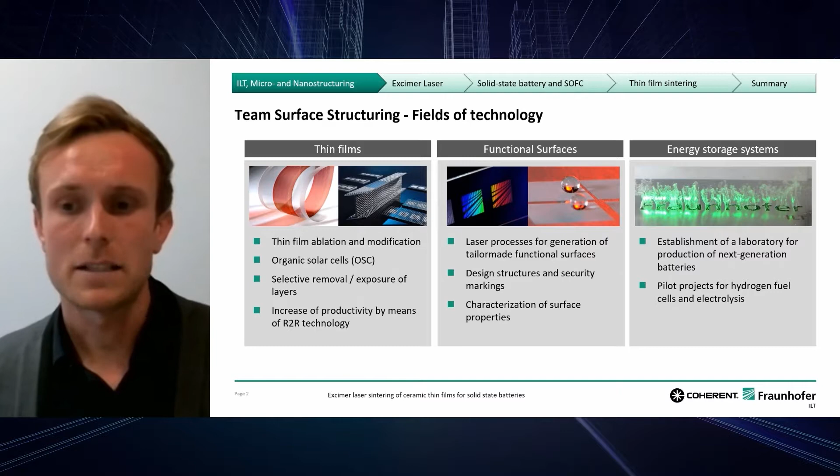For that we established a new laboratory with equipment for both production and characterization. One very important tool for the production is this laser system from Coherent. This laser system consists of two parts: the laser itself, and the optical guiding system, which modifies and guides the beam towards the working station.

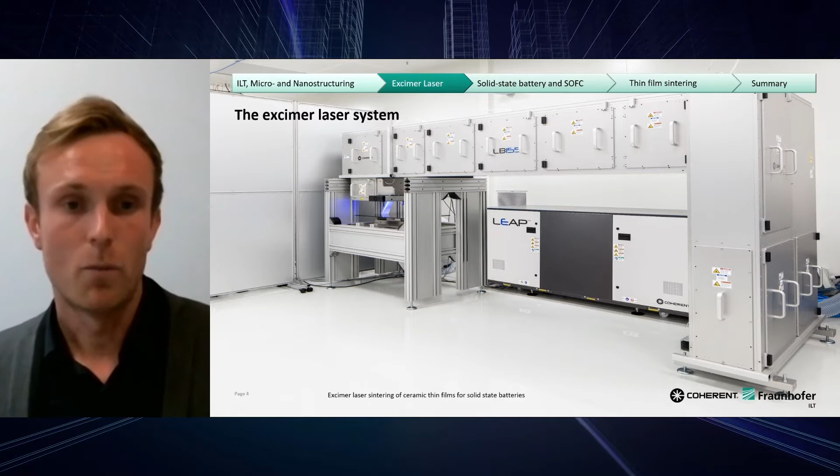To give you more information about this laser station, starting with the laser: it operates with a gas mixture of krypton and fluorine, resulting in a wavelength of 248 nanometers. That's very short, and due to that we have very short optical and thermal penetration depths, which is very good for material processing. Due to its high pulse reproducibility, shown top right, of 1 joule per pulse, and its maximum repetition rate of 150 Hertz, we can obtain a maximum output power of 150 watts, which is pretty large.

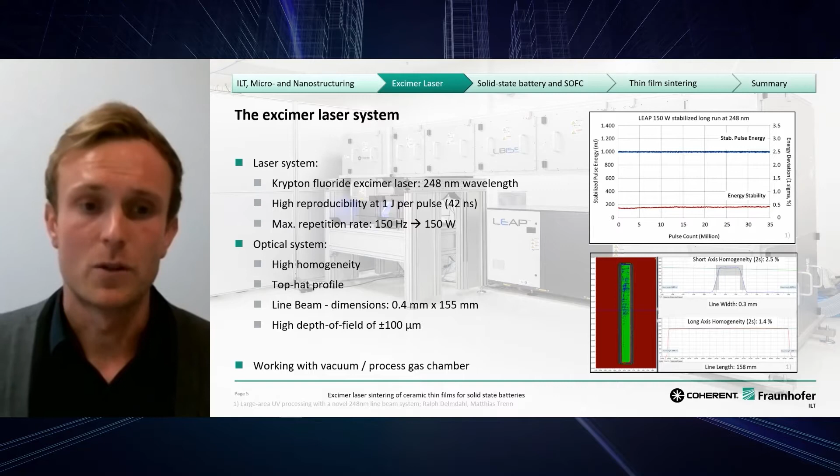Another unique characteristic is the optical system. First, the top hat profile with a line beam dimension of 0.4 times 155 millimeters, which is pretty huge compared to a commonly used laser system. With its high homogeneity, shown at the bottom right, and its very large focus field, we can process large-scale samples, which is very good, also with a vacuum or process gas chamber.

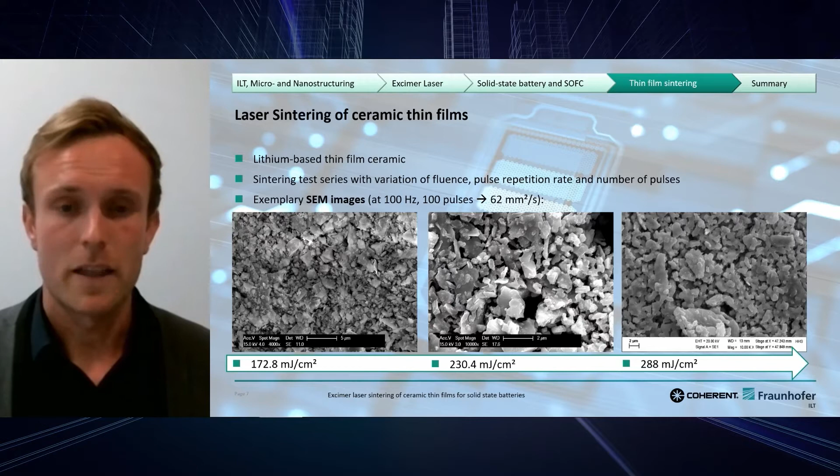Sintering is possible in general, but another thing to look at is whether the electrochemical properties stay the same, or whether they maintain.

On the other hand, we can say that with the sintering process, a phase change can be avoided. There's only a variation of intensity, which can be related to a rearrangement of the lithium ions to another lattice structure or orientation, but this will not impact the electrochemical properties.

Another look should be taken at the layer thickness, because with that we can determine the maximum energetic penetration depth. This is the depth beneath which the material will not see any light, any energy, any thermal damage.

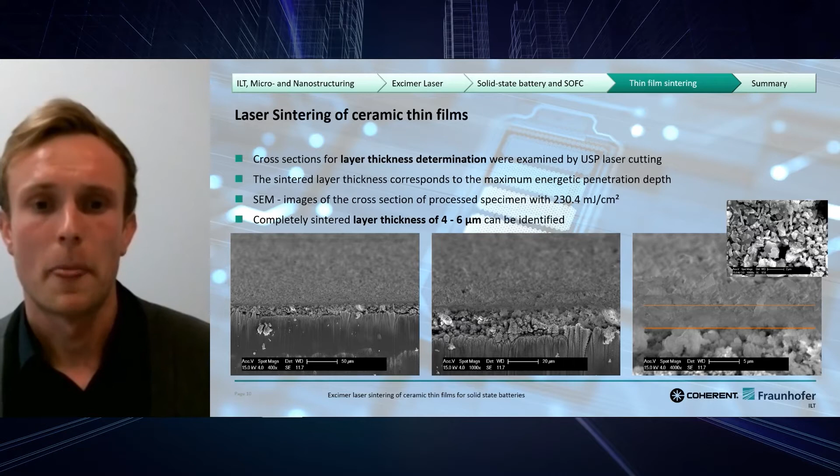To sum up, we can say that the complete sintering of ceramic thin films is possible, that we have to stay beneath a fluence threshold to avoid a phase change, which can occur at higher fluences, and that we can precisely carry out depth-selective sintering of these samples.

Proof that the electrochemical properties maintain has yet to be carried out, but I want to mention one other thing: this process can be easily upscaled.

Thinking of a laser system that provides more power, such as the Coherent VYPER system, or a larger top hat profile with the line beam 1500.

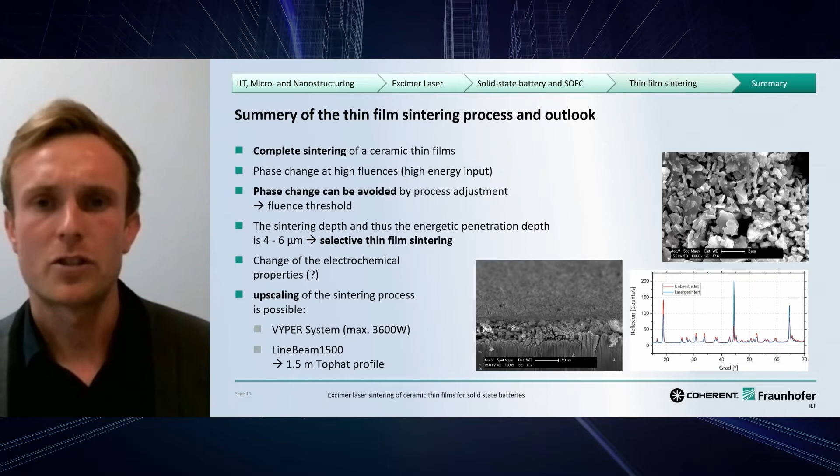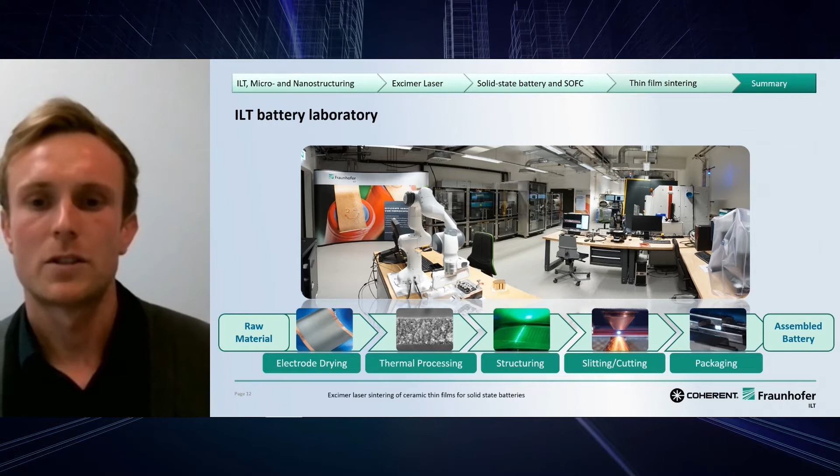Last, I want to mention our new laboratory at the ILT, in which the characterization of the electrochemical properties will be carried out in the future. This laboratory is not only for the characterization, but also to present a whole process chain from the raw material to the assembled battery. And with that, I'm at the end of my presentation.

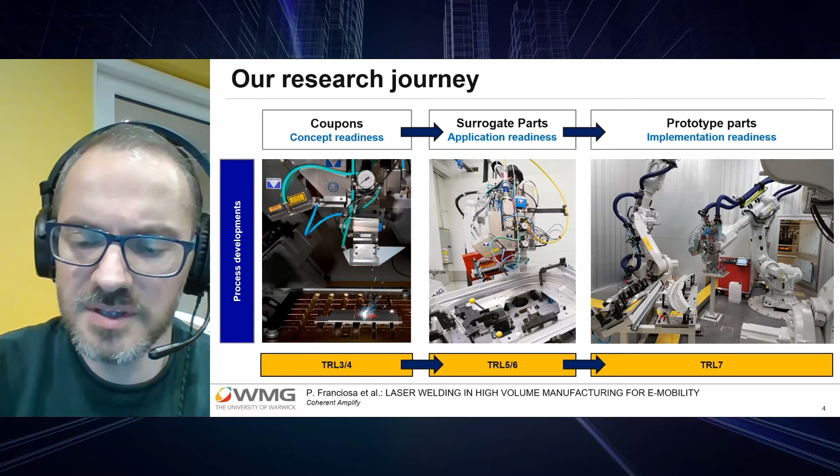Now, talking about the applications we have been developing using the ARM laser technologies, you can see here three examples. Clearly, given the time, I am not discussing all the applications we have developed, but I have only selected the 3 core most relevant ones for today.

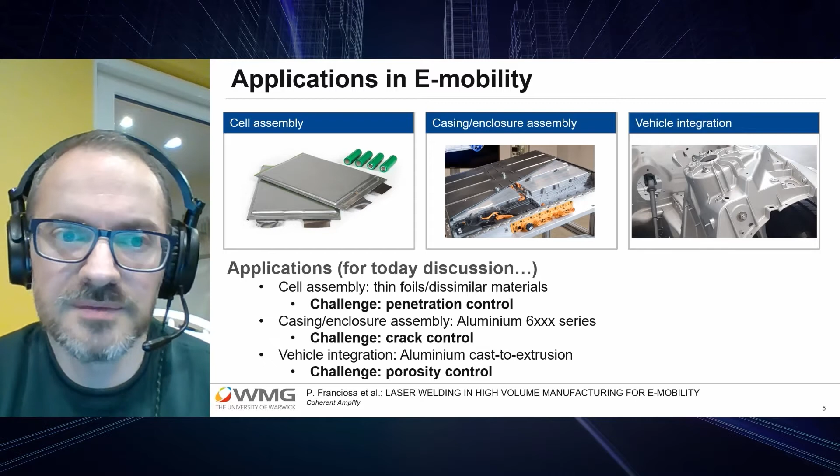Let's start from the equipment. First, we have used the Coherent 10 kilowatt ARM laser integrated with the Precitec WeldMaster, and also interesting to mention the sensor we have used for in-process monitoring of the weld depth penetration: the OCT sensor from Precitec, the IDM sensor from Precitec.

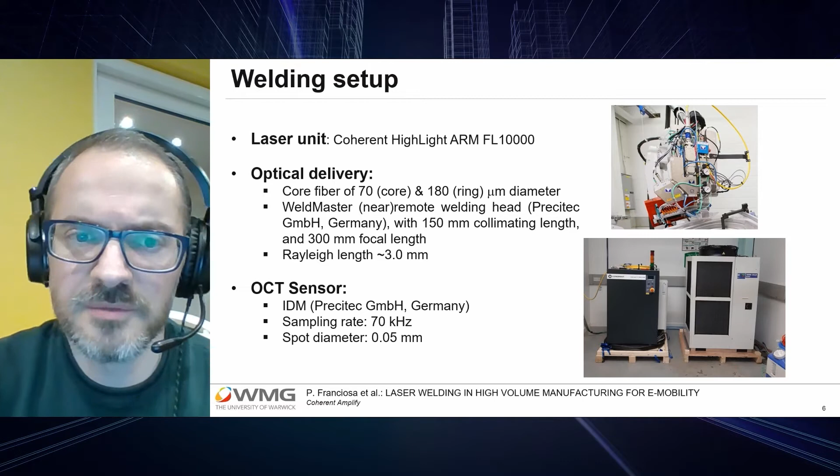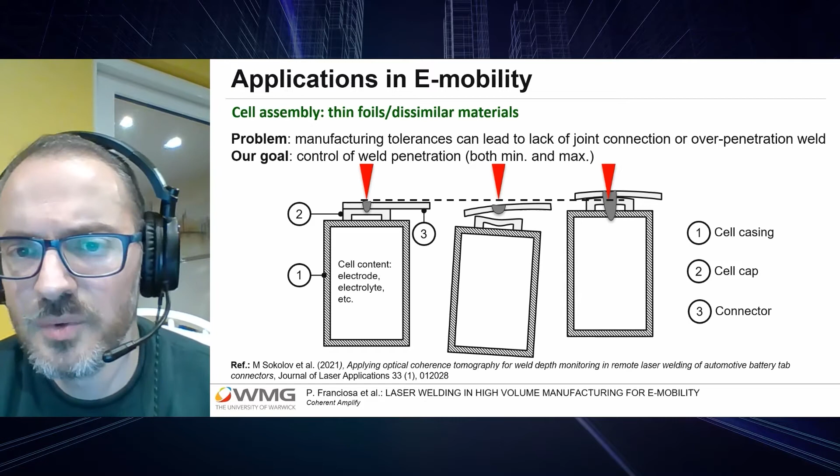So the first application is cylindrical cell assembly. We are dealing with thin foil and dissimilar material. More details can be found within the paper shown at the bottom of the slide. This application has been driven by the fact that when we are in the full-scale manufacturing system, we are dealing with manufacturing tolerances, and given the thicknesses of those components, any variation, either dimensional or geometrical, can have significant impact on the weld penetration.

So the idea was to combine the OCT sensor with the ARM laser technology to achieve, first of all, a stable process, mostly driven by the ARM laser, and because of the stable process, also increased accuracy and reduced variation in the measurement. On the slide you can see the conceptual configuration. One comment is about the TwinTec technology we used for the OCT sensor: we used a dual beam, not only for the welding process but also for the sensing process for the OCT. The first beam was pointing towards the bottom of the keyhole, and the second beam was pointing towards the top of the aluminum, that is the top part.

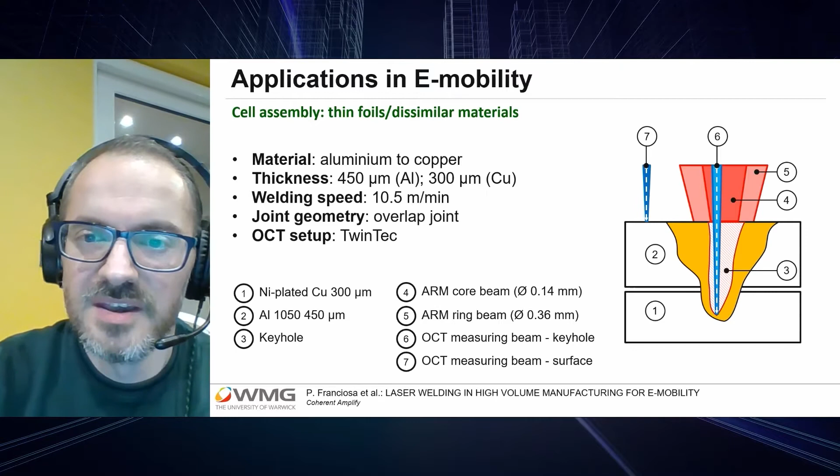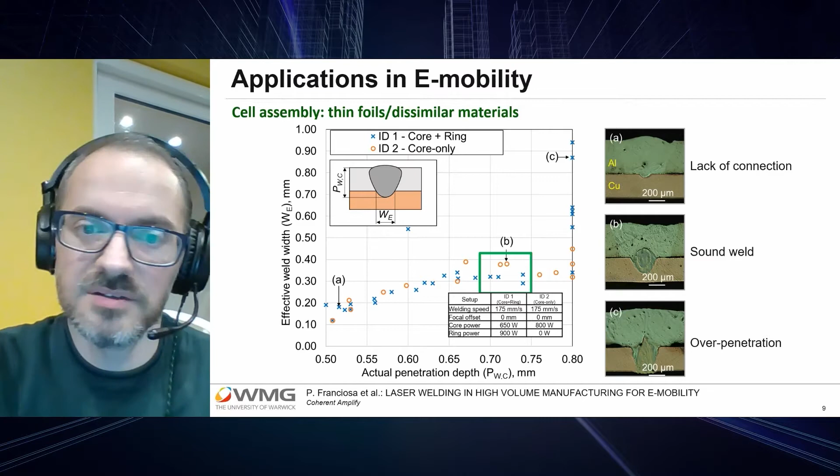So let's see how we developed this application. We tested the impact of core only versus core plus ring. The process window is shown here within the slide. We selected the power level such that we had very similar penetration for both ID1, core plus ring, and ID2, core only. This corresponds to position B here within the slide, and you can see the cross section - this is what we call a sound weld. This was our baseline as reference. Having this in mind, we also took some high-speed video with the high-speed camera.

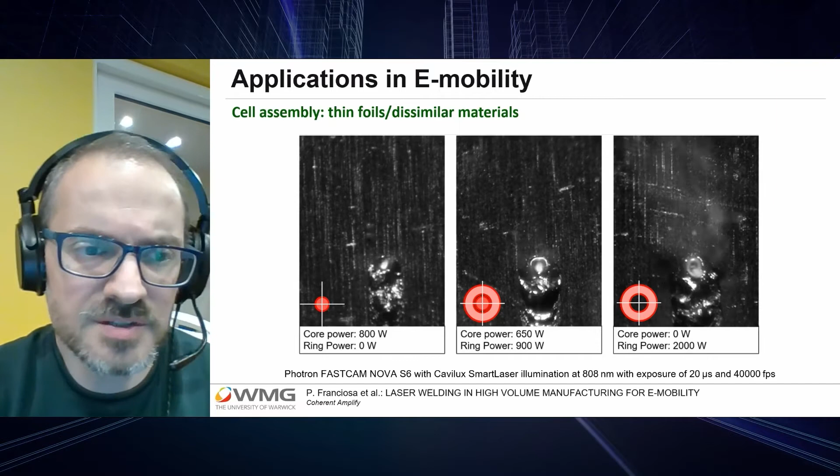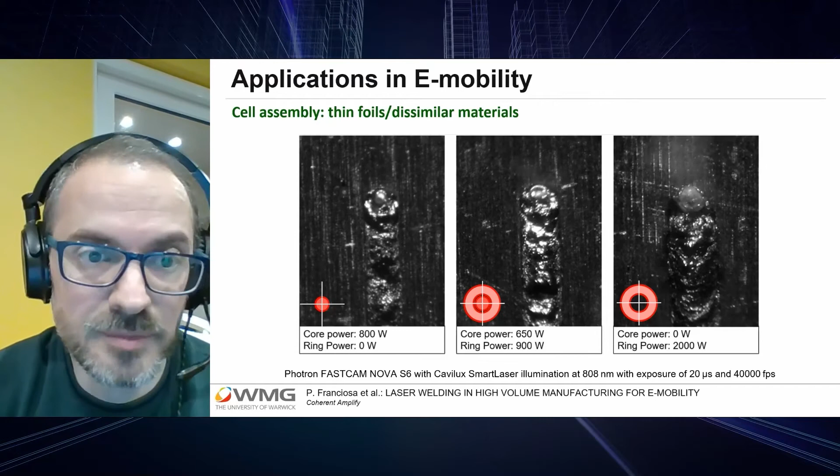If you focus on the video on the left-hand side and the video in the middle, the left one corresponds to core only, and the middle one is core plus ring. We can see clearly that when we use core plus ring, there is a smoother process with a reduction in spatters.

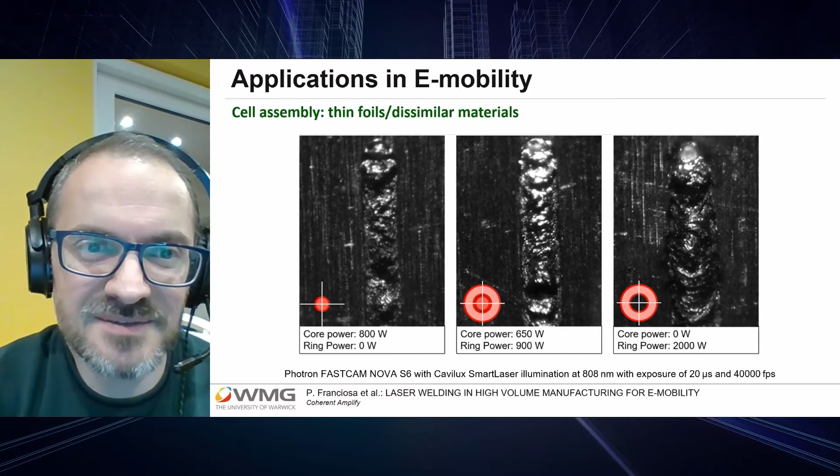Because sputters are most likely related to the instability of the molten pool and instability of the keyhole, we aimed to understand if this is true and if it's reflected within the OCT signal. This is what we've done and what I'm showing in the slide.

If you look at this, consider ID1 TwinTec on and ID2 TwinTec on. The first two box plots on the right-hand side chart tell us that the average weld depth error is significantly reduced in case of ID1, which is the core plus ring case together. The error we're plotting is between the OCT measurement and the measurement taken directly with the destructive cross-section.

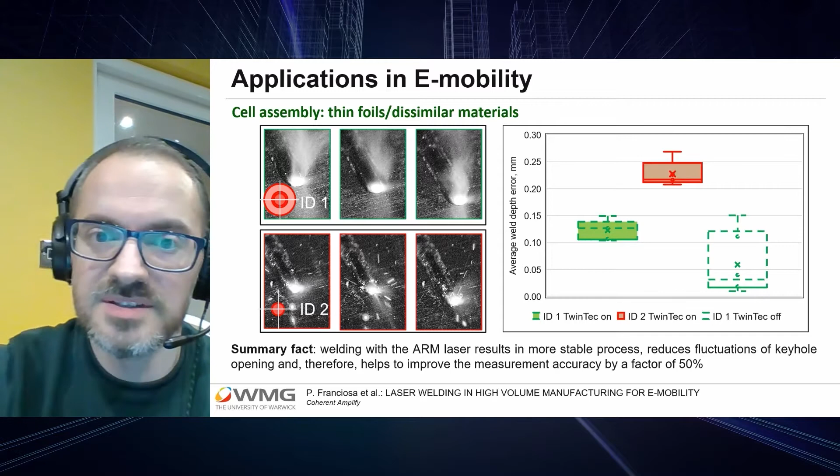There is almost 50% reduction in error by using core plus ring. So the benefits are clear in this application — by properly selecting the laser power on the ring, the welding process becomes more stable. Because of that, the measurement with OCT is also more repeatable, and the error is significantly reduced, as you can see from the result on the slide.

The second application is more related to casing and enclosure assembly, specifically looking at construction with high-strength aluminum 6000 series.

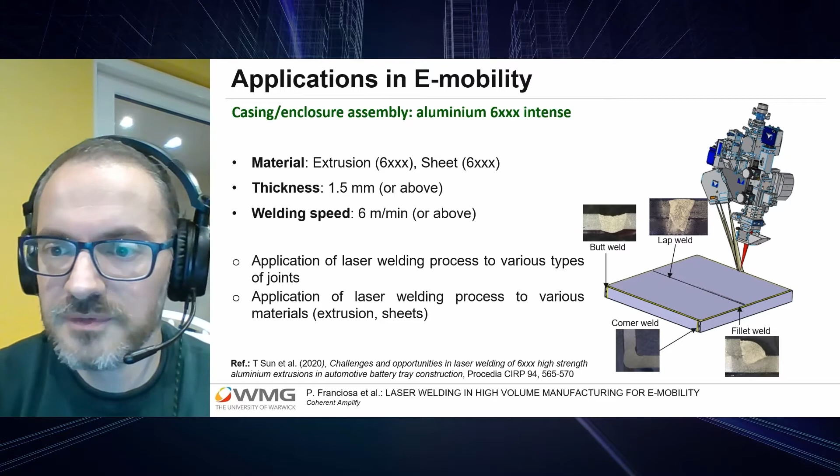More details can be found in the paper cited at the bottom of the slide. The overall challenge was: we know that 6000 series can be welded with filler wire, getting rid of cracks and micro-crack problems, but is there an alternative? Can we use ARM technology, dual beam shaping technology, to achieve similar results? This is what we did.

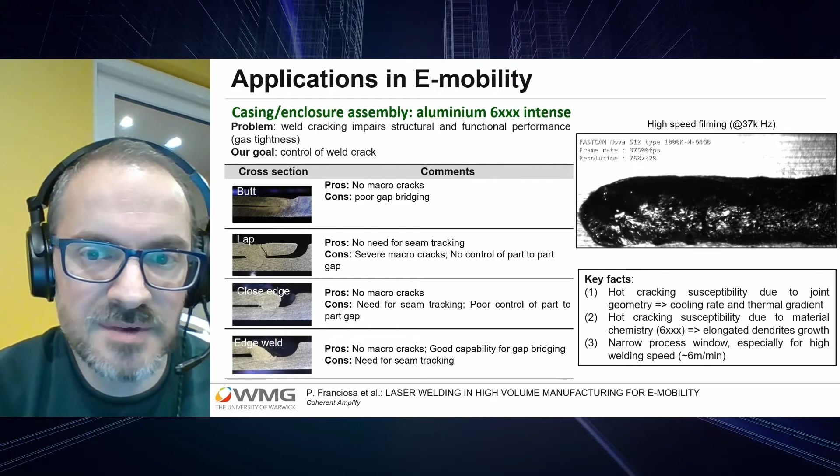We compared a few different configurations: setups 1, 2, 3, and 4. Setup 1 was beam oscillation and power modulation. Setup 2 was the same as setup 1 but with core plus ring laser. Setups 3 and 4 were mostly with filler wire.

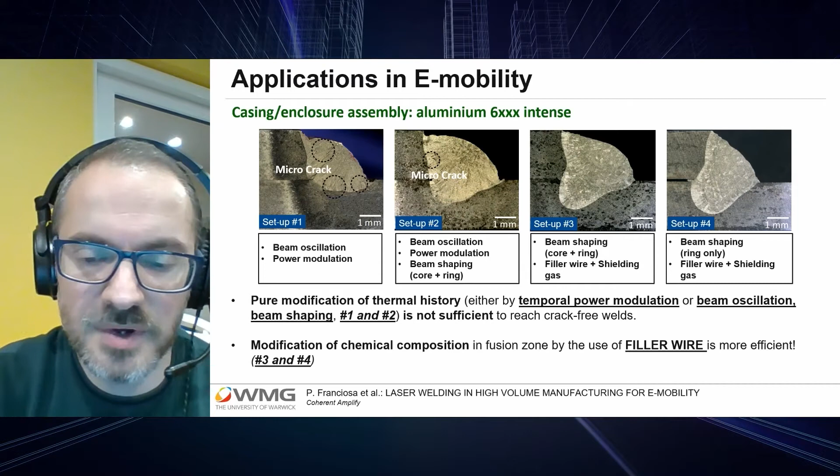Looking at the lap shear results, as expected, using the filler wire gives significantly higher joint strength, almost 50% compared to setup 1. However, we also noticed significant improvement between setup 1 and setup 2 — meaning the integration of beam shaping core plus ring improves reduction in the number of micro cracks within the weld.

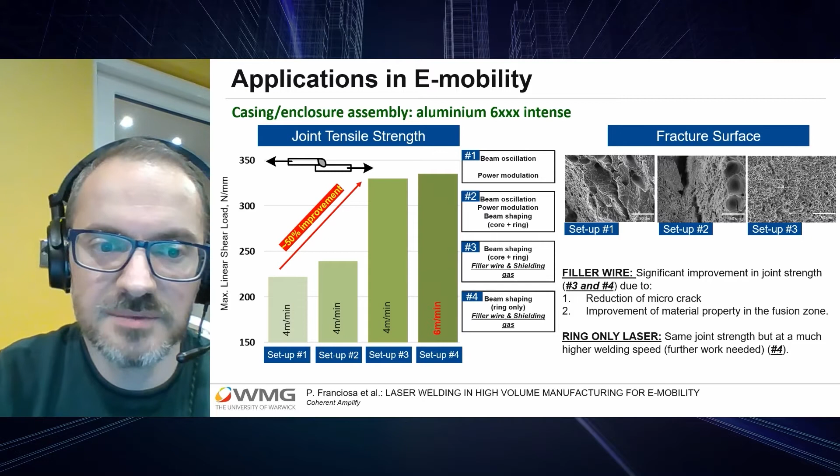The last application I'll show is on the very opposite side of the thin foil — now we're talking about structural components, specifically cast-to-extrusion applications.

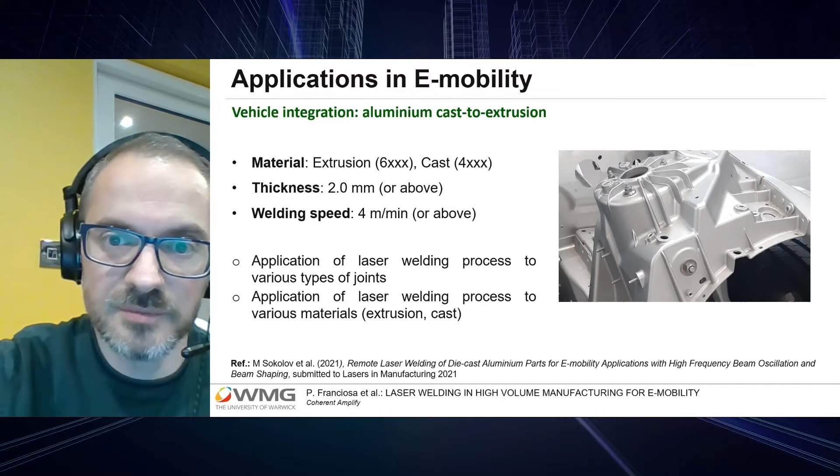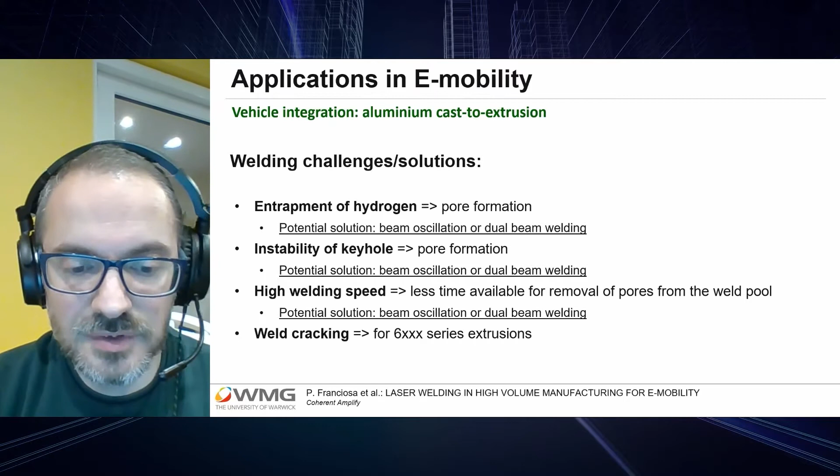We have thick components, nearly 2 millimeters or above. More details can be found in the paper cited at the bottom for your reference. The main challenge in this application is mostly porosity formation, a consequence of hydrogen entrapment within the base cast material during the casting process. So the question is how to get rid of this porosity, this gas, during the welding process.

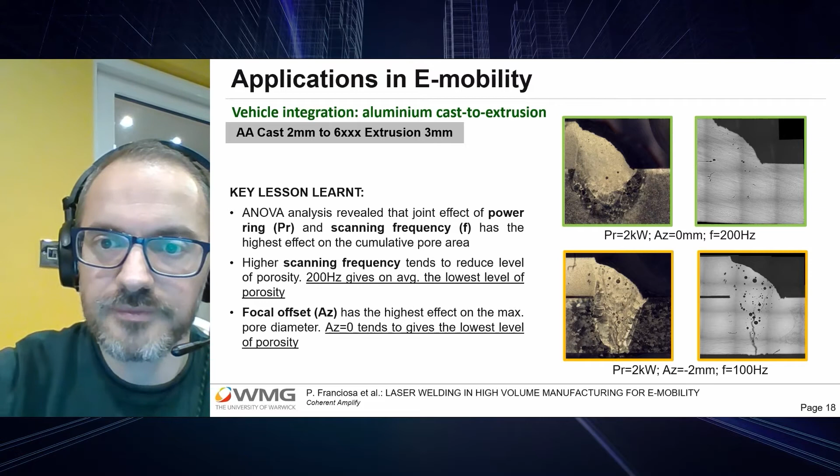We had two sub-objectives for this application. First, proving that using ARM laser technology we can achieve a stable process, and indeed we've seen good results. Even more interesting is whether it's possible to achieve repeatable and accurate measurement using in-process sensors such as OCT. We achieved promising results there too, showing a 50% improvement in accuracy when using the dual beam, core plus ring, compared to using only the core laser.

The second application was about welding aluminum 6000 series. The challenge is controlling the crack level, either macro crack or micro crack, without filler wire. I want to stress again that we didn't use any filler wire for these experiments. The result confirmed there's a 10 to 15% improvement in joint strength if you properly optimize the power level on the ring.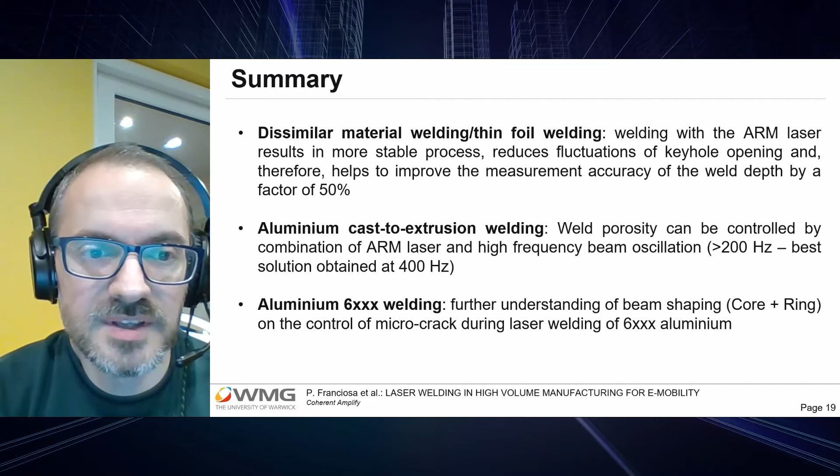So all in all, the real future improvement and development we see out of these three applications is really within the 6000 series aluminum. Even though we have some improvement within the weld in terms of strength and reduction in cracking level, more investigation is required to increase the strength even more and make it compatible with expected stress and strength levels within the weld.